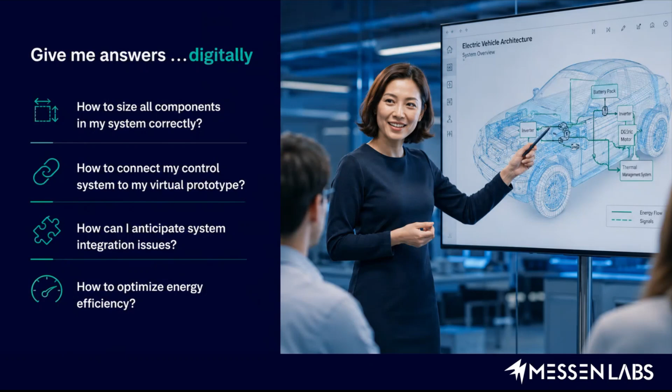Simulation today has already proven its worth in the industry. We already know it, it's been in the market for decades now. It reduces the need for physical prototypes, it accelerates our development process, and it reduces the costs. So we no longer have to stick to the iterative build and break cycles of the past.

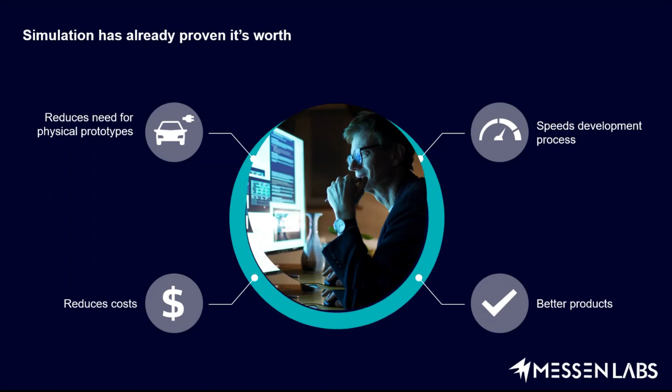It ensures that we get better products in the market as well. So for these modern, futuristic, innovative products that companies are racing against time to bring out to the market, we need a platform which can simulate these multiple domains.

In our particular case, they conducted research by carrying out a compilation of different companies, from well established organizations to startups. They compared these organizations by different parameters, such as how well they were able to meet their product launch dates, the quality of their products, return on investment, and such parameters. And they classified these organizations into different rankings, such as best in class, average in the industry, or industry laggards.

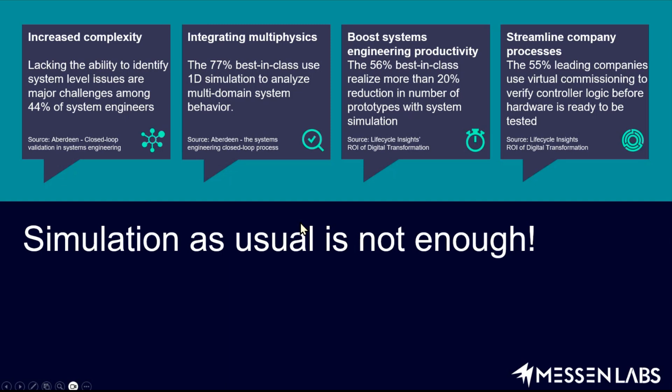And now we'll get into some of the challenges involved in systems engineering. So as we know, just think about it, right?

You are integrating multiple physics. Normally engineers tend to be specialists in one particular domain, and herein you are asking the same engineer to answer questions such as how a change in his particular domain is going to affect something in a completely different domain. Naturally, it's going to take the engineer more time to answer these questions. Hence it involves a good level of complexity in systems engineering in general.

Organizations today use in-house tools which enable them to carry out such simulations. However, these tools require quite a bit of learning, and hence only a certain few people will be able to make the most of these tools.

And if, for some unfortunate circumstance, such people were to leave the organization, then the systems simulation will be vulnerable, because most of these tools aren't fully documented. A lot is lost because the people who were able to use it have left, and the newcomers who want to use it, even if they try, will not be able to make the most of such tools.

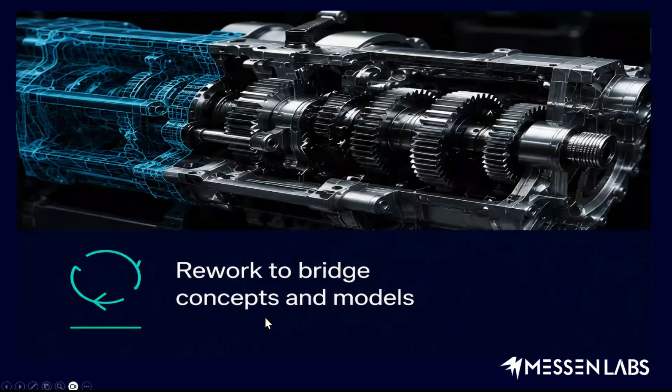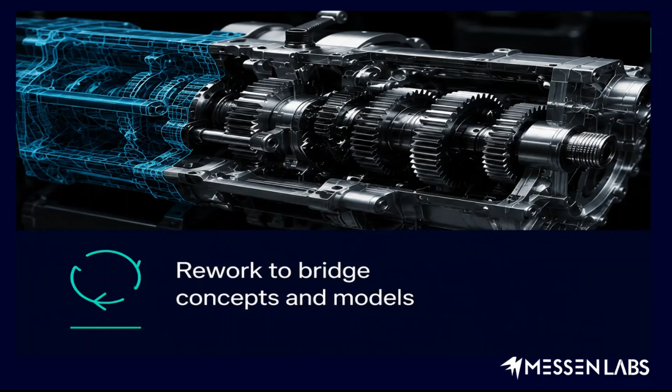Now, when the product development process evolves, more information becomes available and more decisions are taken. This means a high level of detail in models is required. Very often engineers run into limitations of the early models made, where adding more details requires so much rework that making a new model itself is more efficient. This can repeat itself several times during a single product development process.

System simulation and models are very powerful, not only to create the right system concept, but also to tune parameters and run simulations for optimization purposes, for example to meet individual customer requirements. In practice, both activities are assigned to model experts because of the complexity and knowledge required to run simulation models. Due to time restrictions, the result is often that the full potential of system simulation remains untouched.

Well-known system simulation tools typically require a steep learning curve and programming skills before being usable for engineering. New engineers who are passionate about implementing their designs come into the field hoping to quickly build up their designs and validate them. However, if they were to know they'd have to learn a lot about the tool itself, it would naturally discourage them, and many might not make the most of it, or might just drop the entire thing due to the steep learning curve involved.

Hence, this is another challenge that is generally faced and seen in systems engineering.

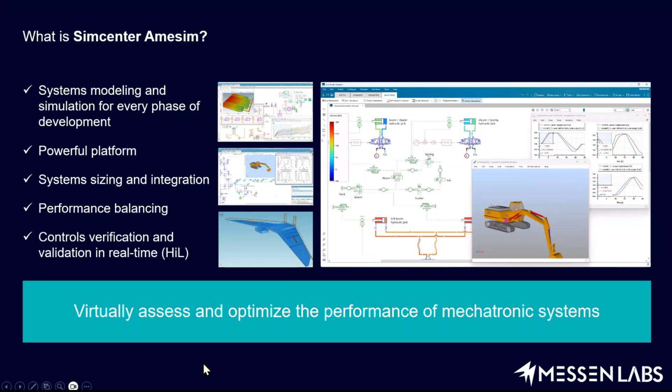As I mentioned, it has ready-to-use multi-physics libraries and components. System sizing and integration can be taken care of. It is a very open environment, so link and connection with Simulink, FMI, Modelica, real-time target support, and other Simcenter and Teamcenter software is possible. It is a scalable platform, so right from the initial level of your design to your advanced final design, you can do it here. A lot of exploration and post-processing capabilities are provided as well.

And so you needn't start from scratch. A wide range of application and industry-oriented solution models with explanations are available inside the software itself. So you need not start from scratch. You have good reference.

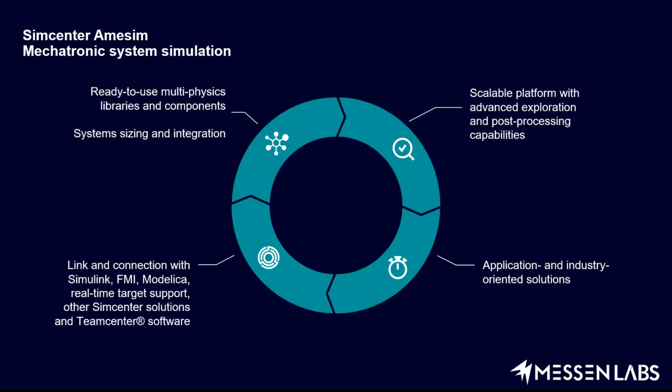It helps to model multi-physics system performance, helping us predict complexity with 50 ready-to-use libraries with over 6,500 components, and application and industry-oriented solutions.

For advanced controls design, it also has features such as a state chart environment and a reduced order model builder, so you can bring in your complex data and the software will convert it into a 1D system model which you can use in your simulation.

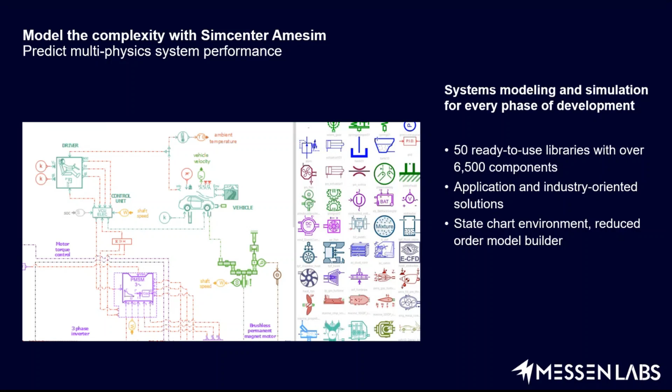Now we move to the unleashing innovation side of the session, where we look at Practicon, an industrial machinery use case. They were able to improve the reactor cooling system with Simcenter Amesim. They created a digital twin of the cooling system and simulated multiple scenarios to verify the new system before implementation. More than 50 safety critical test case scenarios were virtually verified before the factory acceptance test for their reactors. This cooling system is what they built.

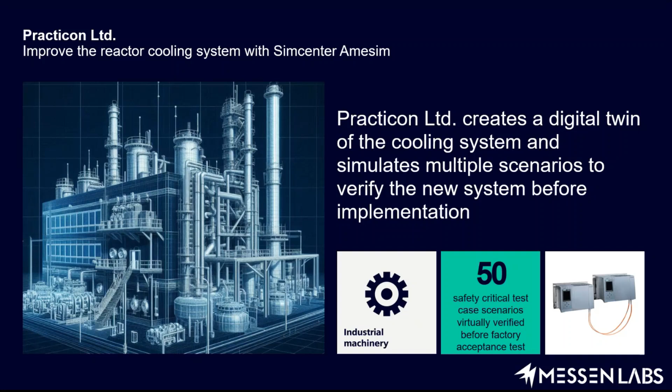Linear analysis capabilities: you know that multi-domain system simulation is going to involve a lot of non-linear equations. However, in spite of that, to easily do advanced control analysis like FFT, Bode plots, and Nyquist plots, we have linear analysis capabilities as well.

We have a performance analyzer which gives in-depth details about your simulation. So if a simulation is taking slightly longer than it should, you know what component is causing that and how you can best rectify it. Plot, dashboard, animation, and design of experiments are all possible as well.

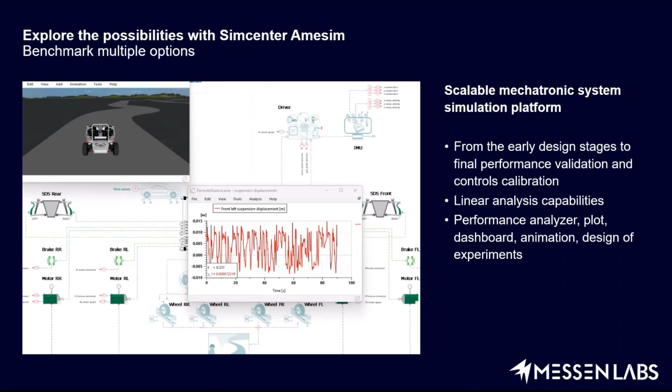For each instance, you do not want to make a change and then run the simulation manually, since that takes time. What if you were able to run one single simulation, but in the background the software would solve for multiple values, showing how the model behaves across a set of values? You can do this through the design of experiments optimization capability, and you need not take your software to any other optimization tool. All of this is possible inside the software itself.

Hyundai Motor Group was able to use Simcenter Amesim to analyze hundreds of parameters to optimize their chassis performance. They achieved a 99% reduction in subsystem parameter optimization process time, from 1 week when manually changing values, to 15 minutes using these optimization capabilities for their chassis.

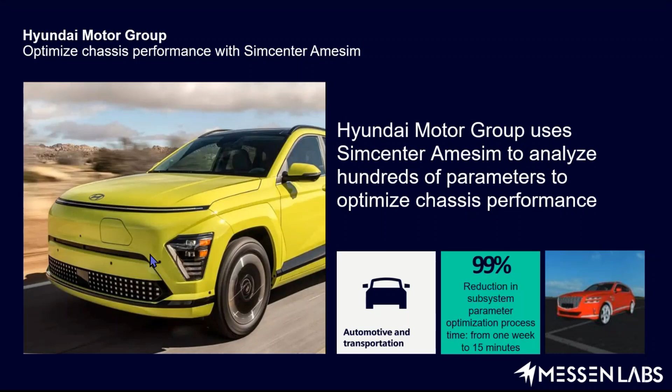It has a lot of integrated design exploration tools. You can create your own custom widgets for different purposes like importing model parameters, automatically running simulations, or launching post-processing scripts, and workflow customization is possible as well. These custom widgets are called apps in the software, and you can build them to customize the software for yourself.

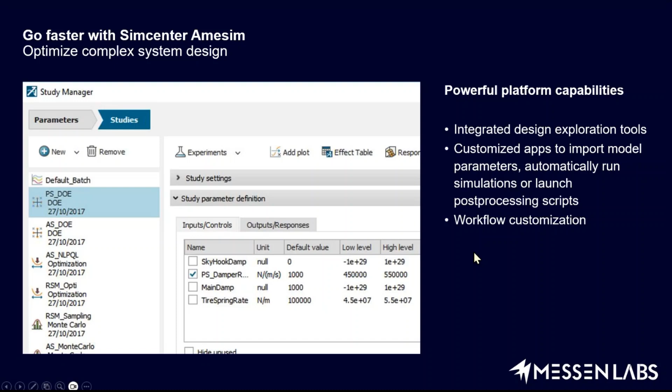You need not follow the same standard procedure which everyone else follows. So as your expertise in the software grows, you can do a lot more and explore a lot more.

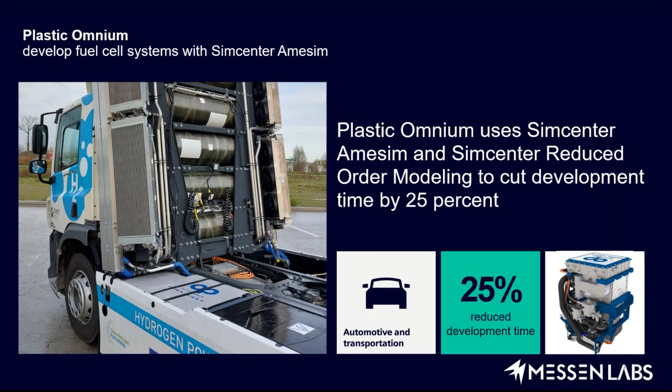In the renewable energy segment, Plastic Omnium developed fuel cell systems with Simcenter Amesim. By using Simcenter Amesim and reduced order model simulation, they were able to cut development time by 25%.

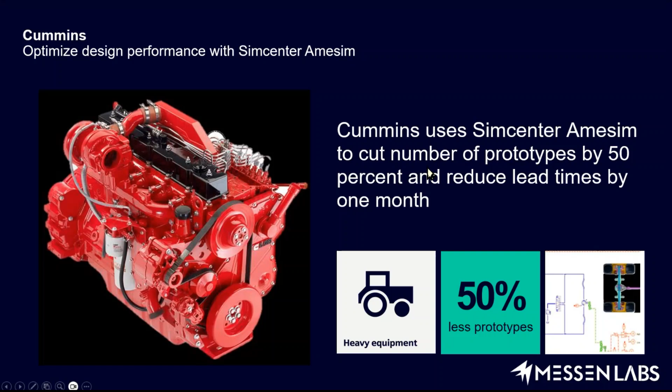Cummins, an organization that has been in the market for more than 100 years, specializes in engines for heavy equipment industry. They've used Simcenter Amesim to cut down the number of prototypes by 50% and reduce lead times by 1 month.

As mentioned, it has a pretty open environment, so you can link and connect with Simulink, FMI, Modelica, real-time target support, and other Simcenter and Teamcenter software. CAD import and embedded CFD capabilities are also there—an initial level of CFD analysis you can do inside the software itself, using a bit of STAR-CCM+ in the background.

CAD import lets you bring in data into your components easily, and of course with Simulink and other software you can easily link as well. It also has direct co-simulation with STAR-CCM+ if you want to do advanced CFD analysis in parallel with the rest of the components of your system.

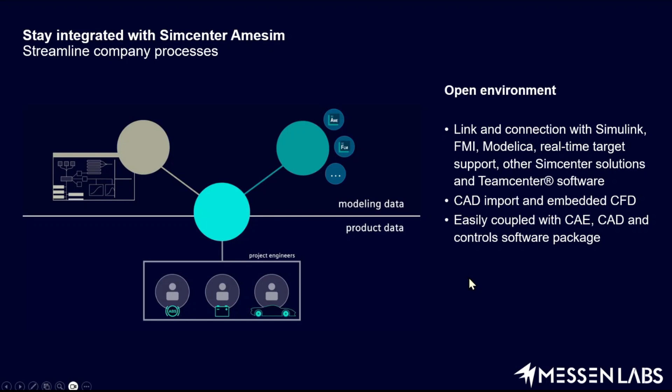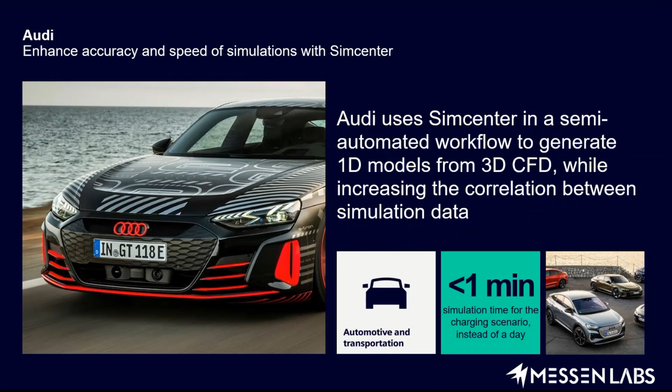Audi uses Simcenter in a semi-automated workflow to generate 1D models from 3D CFD while increasing the correlation between the simulation data. What they could achieve in Amesim was less than 1 minute simulation time for the charging scenario, instead of a day which it would take in a dedicated CFD solver. So they're able to enhance the accuracy and the speed of the simulations as well.

So this is the live demo part of the software.

Okay, this is what I wanted to try to model. I wanted to show you how you can quickly set up an initial level model, so you see how the different domains can quickly interact with each other and be easily solved. So ailerons are basically the small flaps at the end of the aircraft wings. They actuate, turning on when the aeroplane has to flip or tilt in one particular direction.

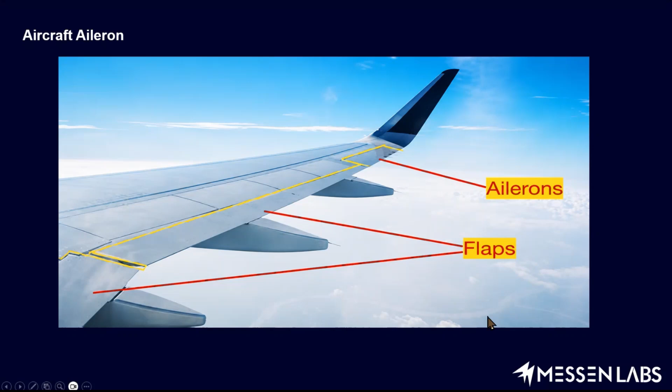So I have a short video which explains just that. I'll just play it.

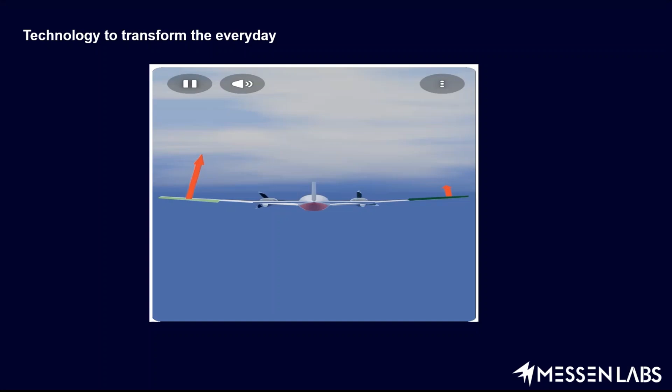So this is how ailerons work basically.

So on an initial level in the software, we want to model it with these components: a voltage source, a converter along with its motor, a gear to be able to reduce the speed while increasing the torque, and a transformer, which is nothing but an ideal lead screw, which can convert the rotary motion into linear motion, used to actuate the aileron. And a flight control module to give the commands for when it has to actuate and when the aileron has to hold.

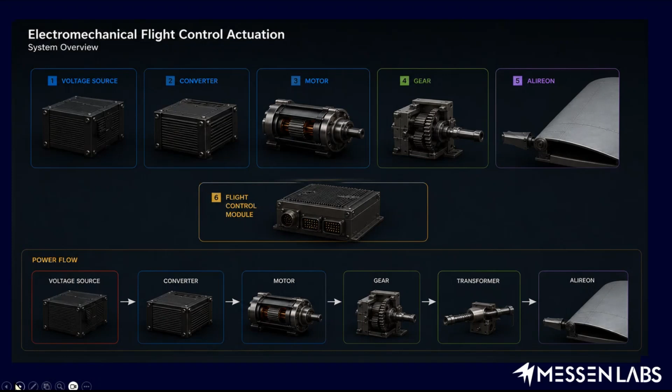So we will get into the software right now. I have a video for the same. Just a second, I think it's loading.

Yeah, so you can see here, we have a motor and a few power sensors, we have a voltage source. For the flight control module, we've modeled it by means of PI loops for the speed loop and the position loop. We have a speed sensor, the gear component, the transformer, the lead screw, and finally a few sensors and a lever arm to act as the aileron. To add the aerodynamic load, we have the torque source and the load here.

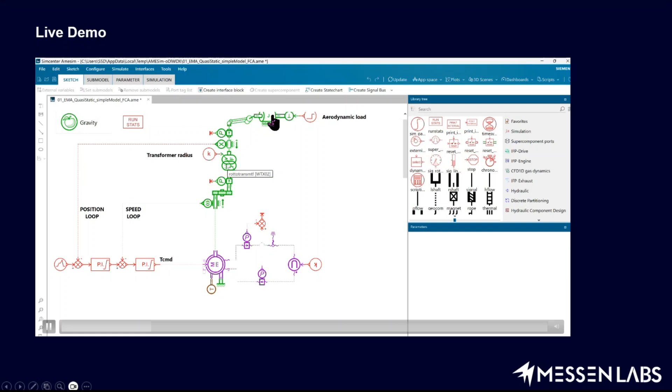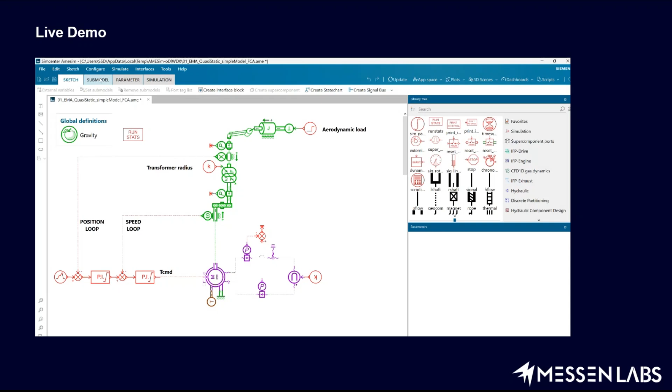So what we're going to do is run the simulation and see how easily the software handles it, along with the gravity component and the run stats component. Initially you set up this model in the sketch section, where you drag and drop components from the library browser and make the wirings. Then you go to the submodel section, where you can fine tune each component, whether you want to increase the fidelity, keep it minimal, or slightly change the type.

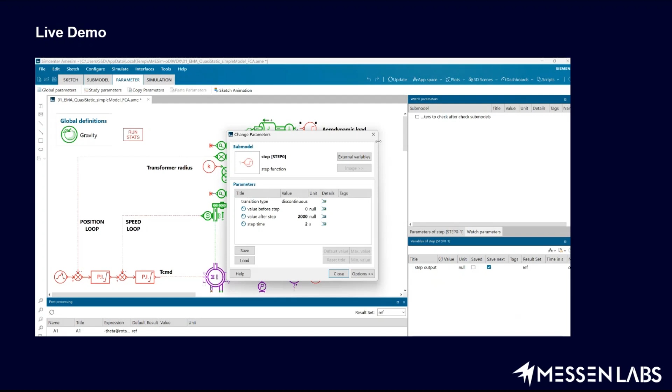Then you go to the parameters section, where you enter the parameters of each component to define the physics. Finally, you go to simulation, where the software itself will do all the compiling for you. You need not set up the solver yourself; the Amesim solver will take care of all of that. So we just need to simulate it, and then we will get the output.

So what we're trying to do is actuate the aileron at a time of 0.5 seconds, and see how the output waveforms respond, whether the motor is able to handle the load, and so on. At a time of 2 seconds, we're going to apply the aerodynamic load, or the wind acting on the aileron, to see if it's able to hold.

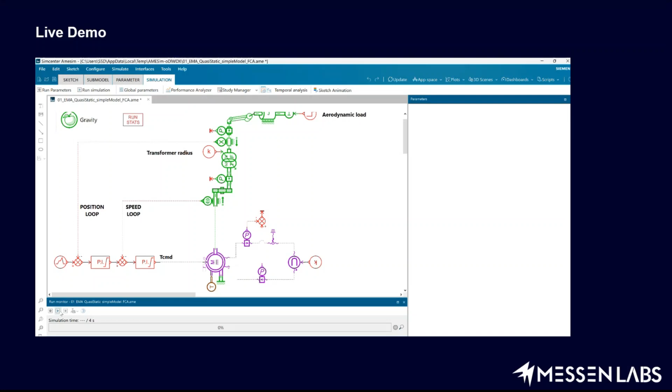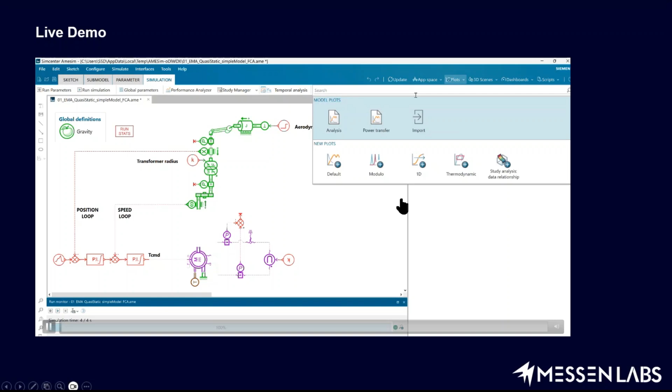So we're in the simulation section now. And yeah, the simulation has quickly been completed.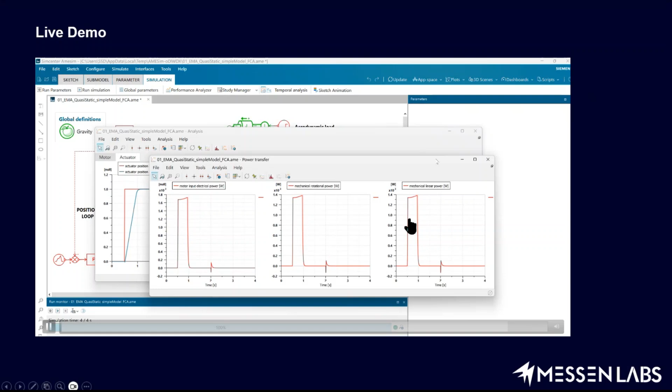So you can see the slight changes once the aerodynamic load is applied, and the slightly bigger change once the actuator is turned on. Similarly, we can see the same for the power as well: mechanical rotational power, mechanical linear power, or motor input power. So this is the demo that I wanted to take you through.

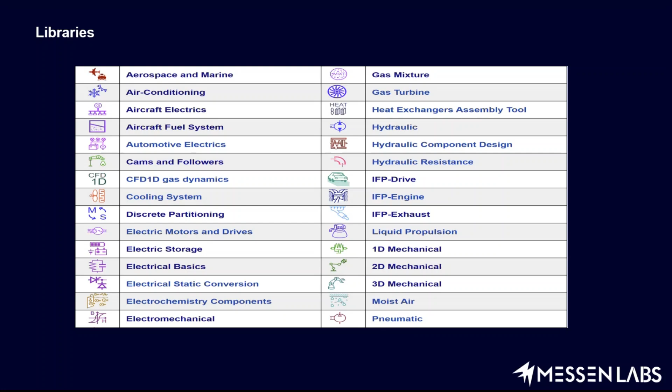So these are some of the libraries—actually all of the libraries. I just want to give you an idea of the different things you can simulate and do in Amesim. So we have aerospace and marine, air conditioning, aircraft electrics, aircraft fuel system, automotive electrics, cams and followers, CFD gas dynamics, cooling systems, electric motors and drives, electric storage, electrical basics, static conversion, electrochemistry, gas turbine, heat exchangers, liquid propulsion, 1D mechanical, 2D mechanical, 3D mechanical, engine signal generator, filling, fluid storage, fuel cell components, fuel cells and electrolyzers, gas. All of these will have their own set of components.

The library browser will contain each unique component for each of these libraries in their own unique color codes—components to design the powertrain for advanced control and signal modeling, thermal hydraulic, two-phase flow, and vehicle dynamics as well.

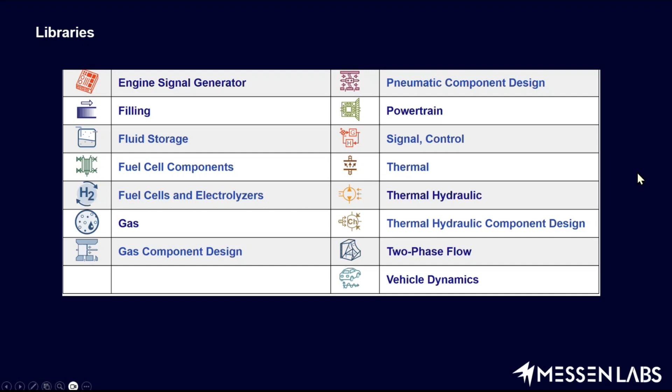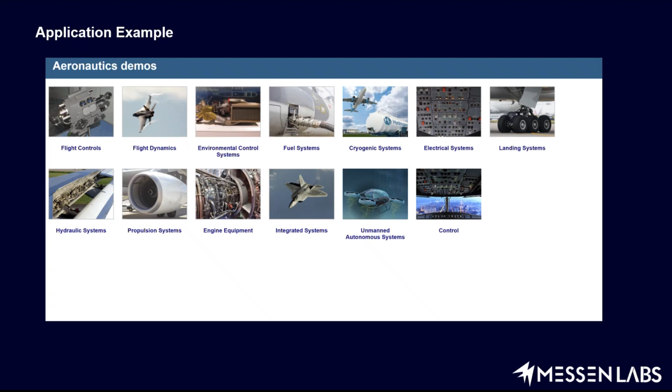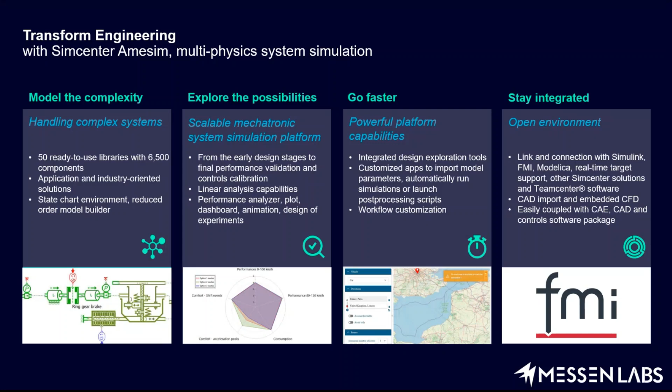And to stay integrated in an open environment, link and connection with Simulink is provided, along with FMI, Modelica, real-time target support, other Simcenter solutions, and Teamcenter software. CAD import and embedded CFD capabilities are there, and you can easily do co-simulation with a lot of different software.

As I was mentioning, these different organizations have been able to make the most of this software for their applications. B Medical in particular adopted Amesim at a time when vaccine cooling devices for transportation and storage needed to be developed and delivered urgently. By getting parameters from suppliers, they could easily and quickly try out components with short lead times in Simcenter Amesim to see if they improved system performance. So by the time they're ready to build an actual physical prototype, it's much closer to the optimum design, saving a significant amount of time for them.